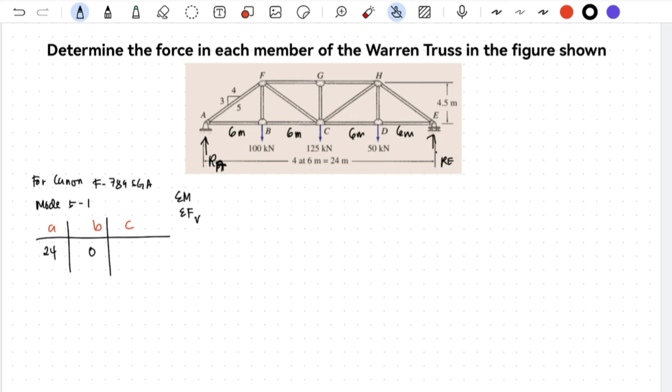So, negative 100 times 6 times 3 equals 18. It's negative because going toward A, the rotation is counterclockwise. Another term is minus 125 times 12 minus 50 times 6, which equals negative 3,600, but we'll enter it in the calculator as positive.

Second equation is the vertical force, meaning there's no moment arm anymore. So negative 100, minus 125, minus 50 equals negative 275. We put that in as positive 275.

Then we have two imaginary numbers since R sub A and R sub E have no value yet. Press equal, and the X and Y components appear. R sub A equals X equals 150 kilonewton. R sub E equals Y equals 125 kilonewton. These are the two reactions in the truss.

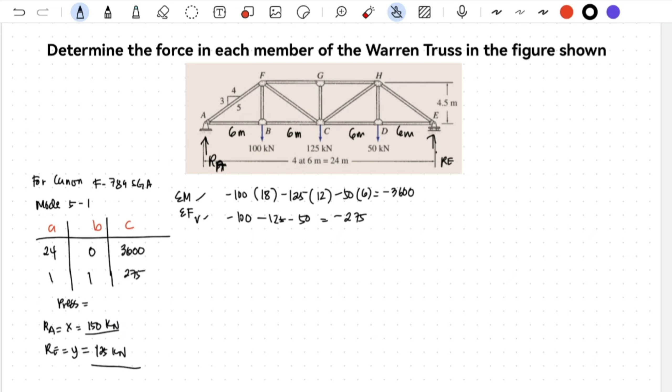From joint A, here's the cut we made. This is the drawing, with an upward force of 150 kilonewton, which is R sub A. We assume the directions are like this. This is AF, and this is AB.

At AF, there are two components, the X component and the Y component. So this is Y, and this is X.

Let's just use Mode 5-1, then A, B, and C will appear.

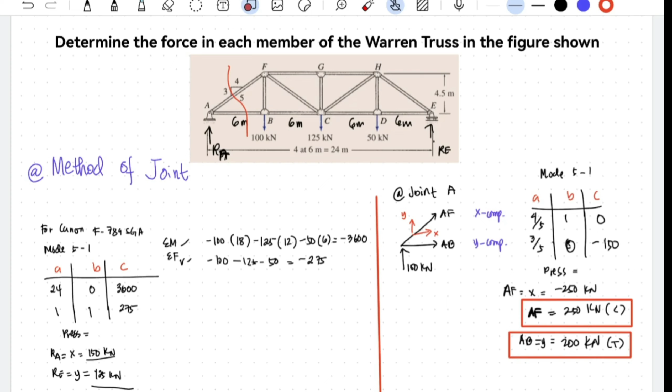So yan, forces from member AB. So may dalawa na tayong sagot.

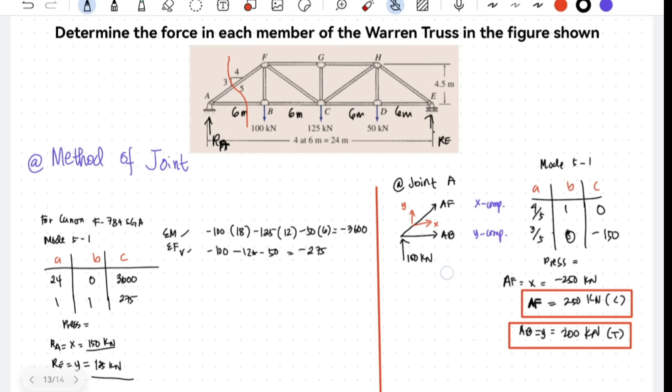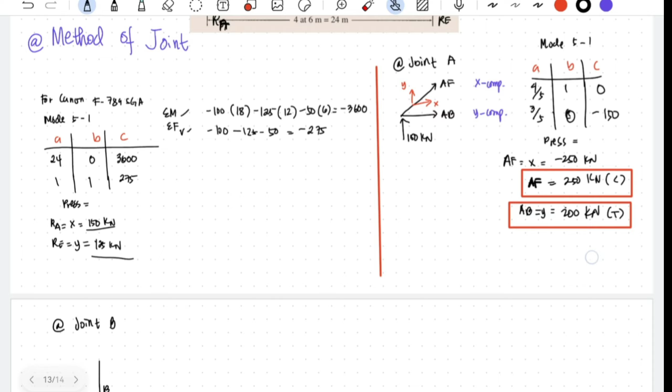So punta naman tayo sa joint B. Dito sa joint B may tatlo. Bali, yung drawing niya is, so di natin alam kung anong direction niya, no? So since alam naman natin yung AB natin, which is tension siya, so away siya sa joint. So may value siya na 200. Dito naman, so para makuha natin yung i-assume natin na ganyan yung direction, so para makuha natin yung

BF, so ito ay BC. Para makuha natin yung value na to is pwede natin i-summation forces vertical or y component is equals to 0, or positive. So minus 100 plus yung BF natin equals to 0. So BF natin is 100 kN tension. Ito yung sagot sa BF.

Another is yung BC natin. So yung BC, since ito ay nasa x-axis, so horizontal force 0, the right positive. So nasa papuntang left yung 200, minus plus BC kasi papuntang to the right. So transpose natin. Ang magiging yung BC natin is tension pa rin. Bali 200 kilonewton tension. Ito na yung sagot sa number BC.

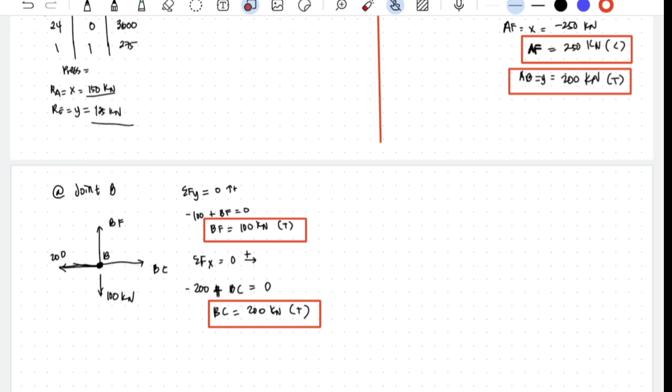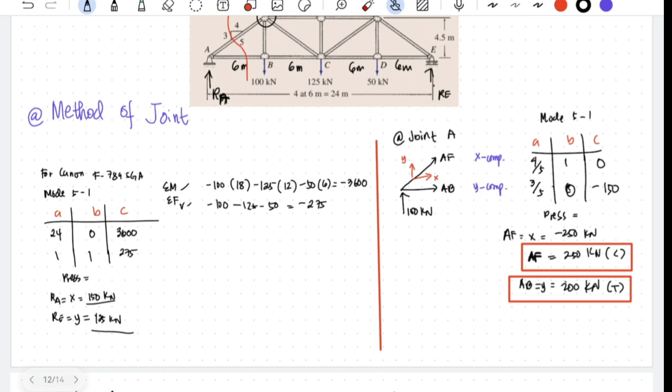So punta naman tayo sa joint. Ito sa joint F. Ito, joint F. Tapos na tayo dito. So joint F na tayo kasi may dalawang value na tayo dito sa AF at saka BF. So joint F tayo. So dalawang anon. Yan dito. May dalawang components. Itong AF.

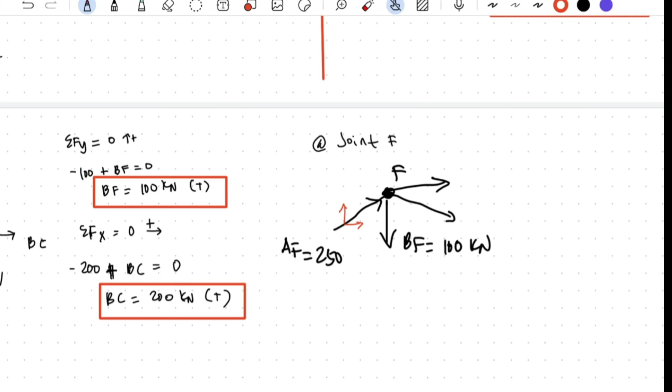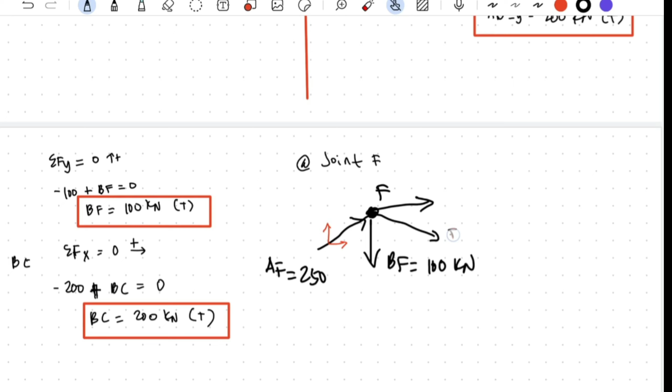Vertical. Yung Y component at saka X component. Ito ding ano to? FC. FC tsaka FG. So dito sa FC may dalawang component to, which is yung Y component tsaka X component. So punta lang tayo sa

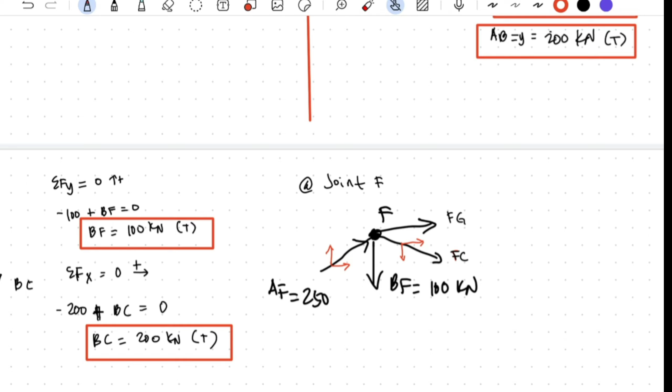Mode 5, 1. So, may lalabas na A, B, tsaka C. Ilalagay natin dito. X component yung mauna. Y component yung pangalawa. Well, dito, first natin na consider yung X component or horizontal force. So may horizontal force or X component dito is yung AF, FC at saka ito, FG.

So, itong AF is constant to, di ba? Kasi may value na 250. Yung, ilalagay natin dito sa A at saka B is hindi constant. So, bali unknown siya. So, unahin natin yung

FG natin. So, FG is 1. Yung FC natin, since ito ay X component, so, to the right yung direction niya. So, magiging, kung X component, which is cosine, adjacent over hypotenuse, so, magiging 4 over 5. Kasi yung triangle niya is ganyan man. So, 4, 3, at saka 5. Adjacent to hypotenuse to. So, cosine.

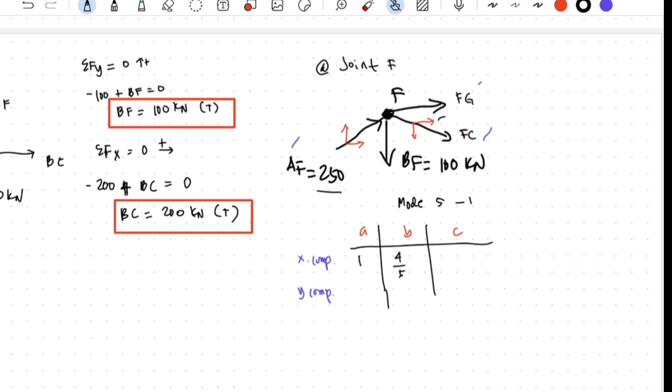Then sa C, yung constant dito is sa X component is isa lang, which is yung compression na AF 250. Since yung X natin is to the right, so magiging 4 over 5 times 250. So magiging 200. Pero ilalagay natin sa calculator is negative 200. So ito yung ilalagay natin, negative 200.

So next is yung Y component natin is dito sa FG natin, di ba? Since ito ay X component lamang, saka walang Y component, so magiging 0 ito. So ang B natin, which is yung dito sa FC. So may Y component, so downward siya, so negative natin ilagay dito.

So 3/5 siya. So yung sa Y component, yung constant niya is isa, yung sa BF, tsaka dalawa, itong sa AF. Bali yung sa BF natin is downward siya, so may negative 100 plus, kasi upward tong AF natin dito sa Y component. So AF 4 over 5, since ito ay Y component, so magiging 3 over 5 times 250. So it is equal sa 50. So ilalagay natin dito is negative 50.

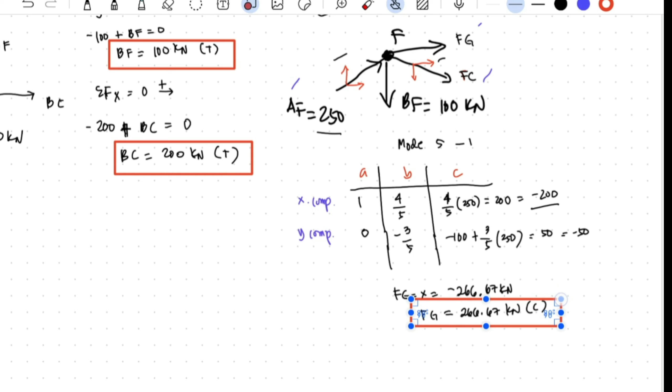Yung result dito ay FG is equals to X is equals to negative 266.67 kN or equal sa 266.67 kilonewton compression. So FG to, box lang natin. So ang FC natin is equal sa 83.33 kilonewton tension, di ba?

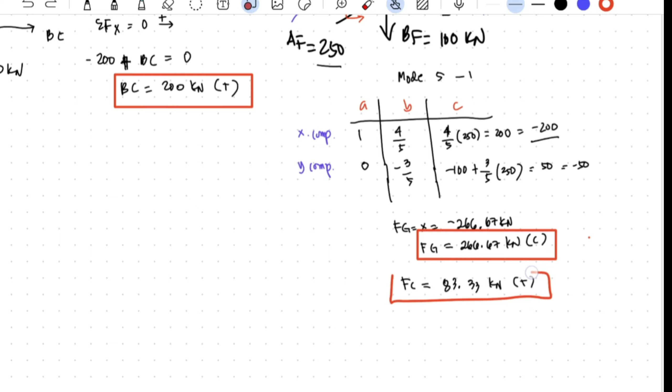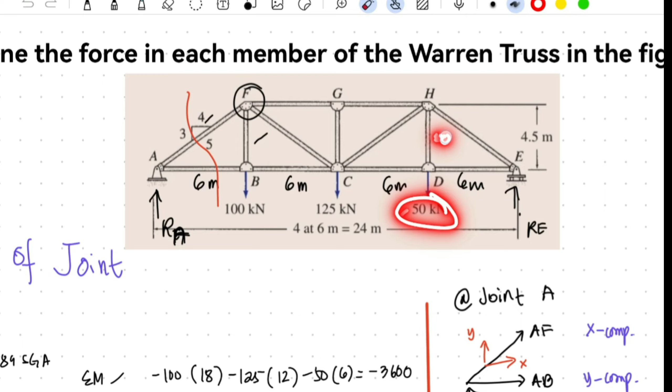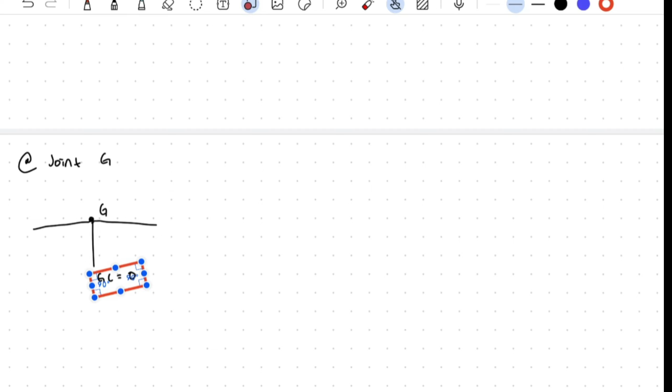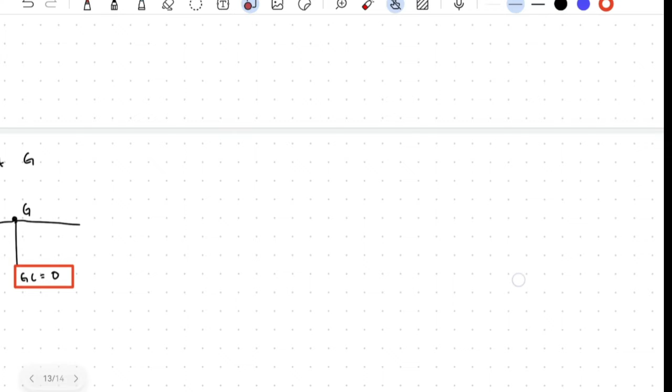May points din yan. So, dito sa joint FG, may value naman tayo dyan. So, ito ay compression. So, ito ay towards sa joint. So, bali yung arrow niya is ganyan. So, ito ay 266.67. So, let's say nga ito yung direction sa GH.

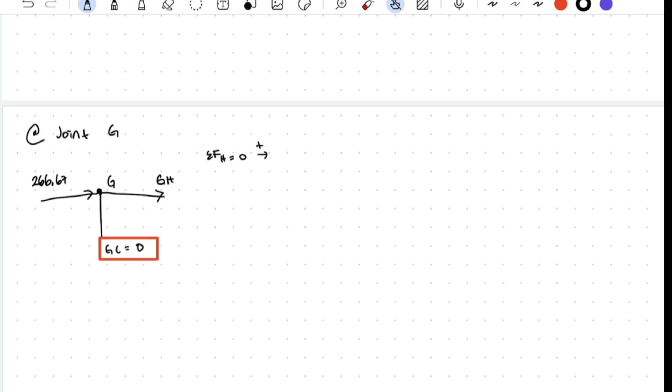So, ito ay GH. So, try natin sa horizontal force. 0, positive. So, to the right, 266.67 plus GH equals to 0. So, GH is equal sa negative 266.67 or equal sa 266.67 kilonewton compression. So, ito rin yung value sa GH natin.

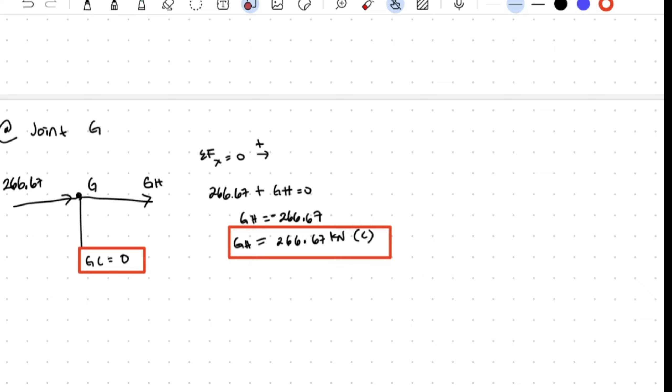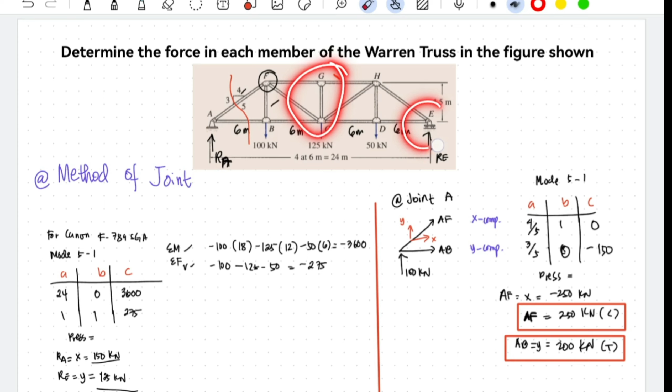Next is yung joint A na lang. So, hindi pa pala. Ang dami pa. So, try natin itong since meron na tayo dito. So, try natin to. Tapos, ito. So, joint E tayo.

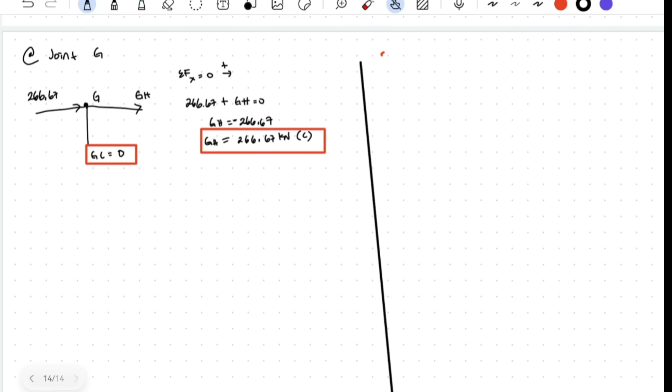Joint E. So, sa joint E, may support upward na RE which is yung value na 125. Tsaka assume natin na ganyan yung direction niya.

So ito ay EH tsaka ED. May dalawang components itong EH, is yung Y component at saka yung X component. Punta lang tayo sa mode 5.1. May lalabas na ABC. Unahin natin yung X component, pangalawa is yung Y component. Dito sa X component, makikita natin dalawang unknown which is yung EH at saka ED.

Start tayo sa EH. Sa EH natin is to the left yung direction niya, so magiging negative 4 over 5. Pangalawa is to the left yung ED natin, so negative 1 kasi hindi yan nakaslope. Yung C natin 0 kasi walang constant na naka-horizontal or X component.

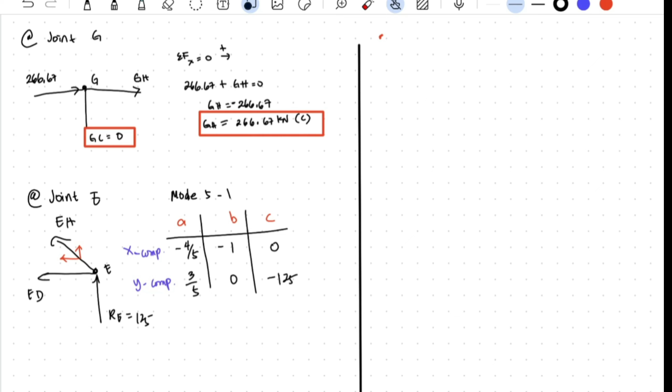So sa Y component tayo. May isa sa unknown, tsaka isa sa constant. Yung EH natin is upward, so magiging 3 over 5 positive. 0 yung B or yung ED natin. Constant natin is isa, positive 125, ilalagay natin dito sa calculator negative 125, kasi sa constant lang yan mangyayari na mag-change yung sign niya. So press equal.

Yung result niya, EH is equals to X. Magiging negative 208.33, or equal sa 208.33 kilonewton compression. Yung pangalawa is ED equal sa Y, equal sa 166.67 kilonewton tension.

So tapos na tayo sa joint E. Sa joint D na naman tayo. Sa joint D, may load na pababa is 50 kN. Ito sa itaas, so hindi natin alam kung anong direction, so assume natin na ganyan, upward tensile siya, tension.

So DH, dito is hindi, so dito sa... may DE, so may value na sa DE natin. Since yung DE natin is or ED, may value tayo dito na 166.67, which is tension. So yan yung reaction niya away sa joint.

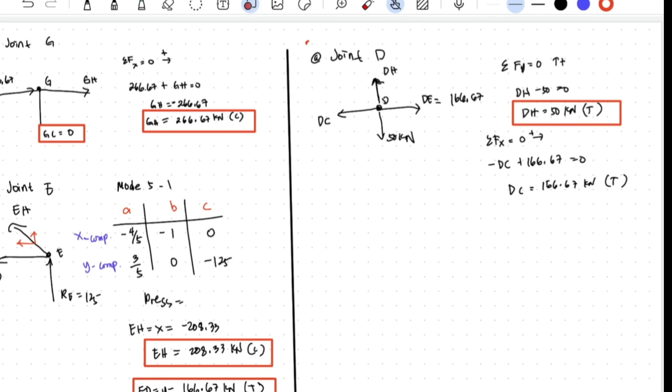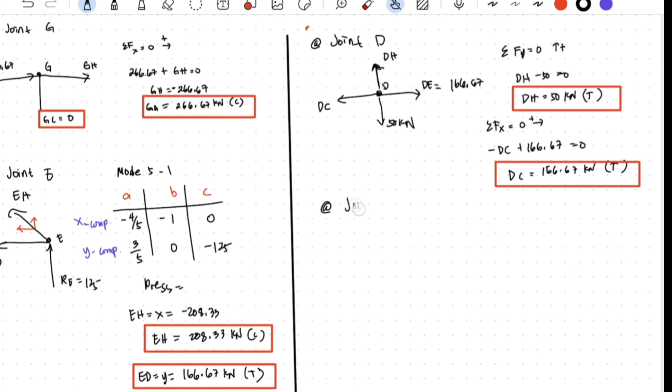So last, itong CH na lang yung missing na force member. Last is joint H na tayo. Dito sa joint H, parang may 4 na member dito.

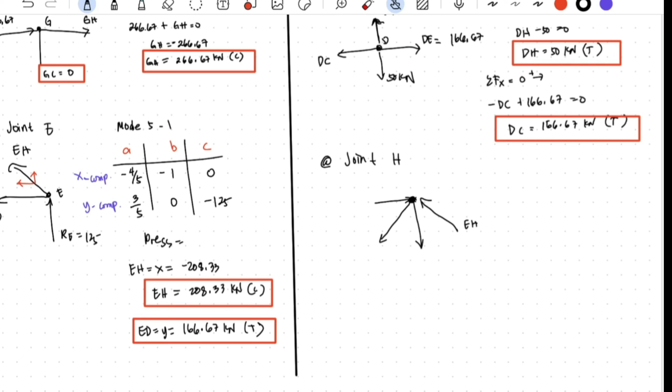Ito ay EH na kanina nakuha natin na compression, so that's why it is towards the joint. Yung value dito is 208.33. Yung Hg natin kanina or GH is compression, so that's why towards sa joint. So ito ay 266.67. Ito ay GH.

Yung hinahanap natin is yung CH. May dalawang components ito, yung vertical at horizontal. Yung last is yung DH natin, may nakuha tayo na tension dyan, 50.

Dito guys, since isa lang man yung unknown dito, pwede natin i-apply yung summation forces. Pwede ka mamili kung horizontal or vertical, pipiliin ko is vertical, yung Y component value. Summation forces vertical equals to 0, upward positive. CH may downward siya, so negative 3... so bali, since ito ay downward, negative 3/5.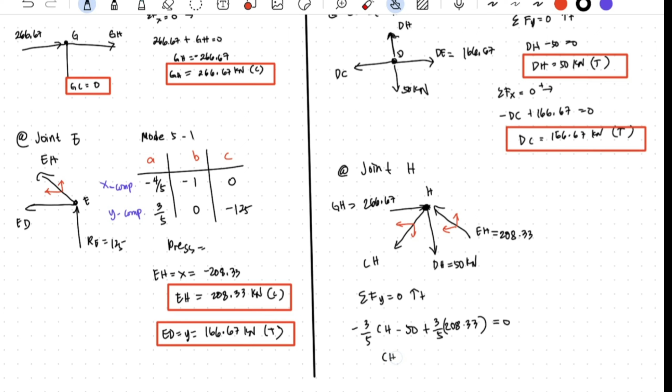CH minus 50. Ito may dalawang component itong EH, upward yung component na Y component dito sa EH. So it is positive 3/5 times 208.33. So this equals sa 0. Yung result natin dito, yung sa CH is 125, naka-round up na, is kilonewton tension.

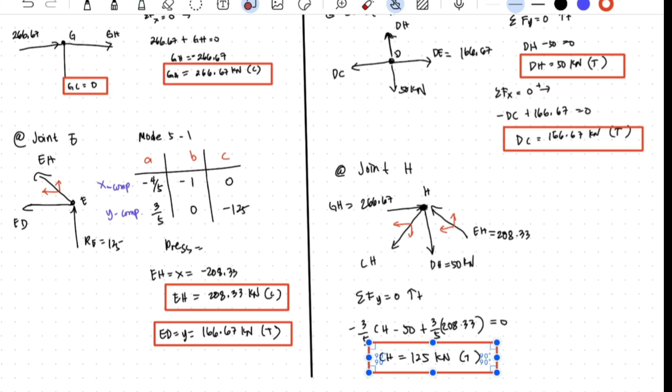So ito yung member CH. I think nakuha na natin lahat ng force, lahat ng member sa Warren Truss. So that's all, ito po yung result ng force sa mga members ng truss natin.